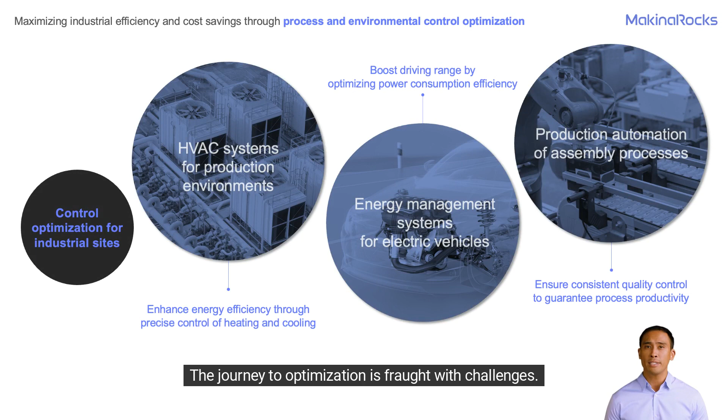The journey to optimization is fraught with challenges. Companies keen on leveraging optimization technologies face hurdles in fully integrating these solutions into their daily operations. The complexity of existing systems, the need for specialized skills, and resistance to change within organizational cultures make the path to optimization a careful one to navigate.

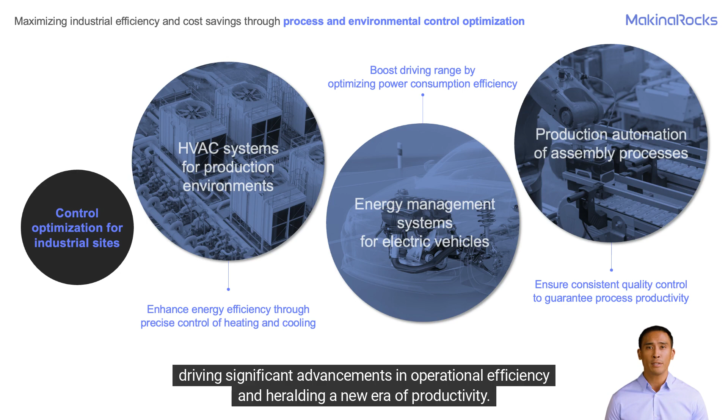Yet, the pursuit of optimization is an opportunity to revolutionize our approach to industrial processes, driving significant advancements in operational efficiency and heralding a new era of productivity.

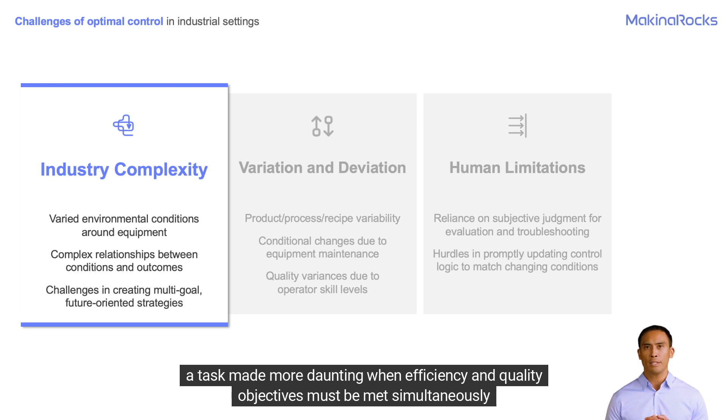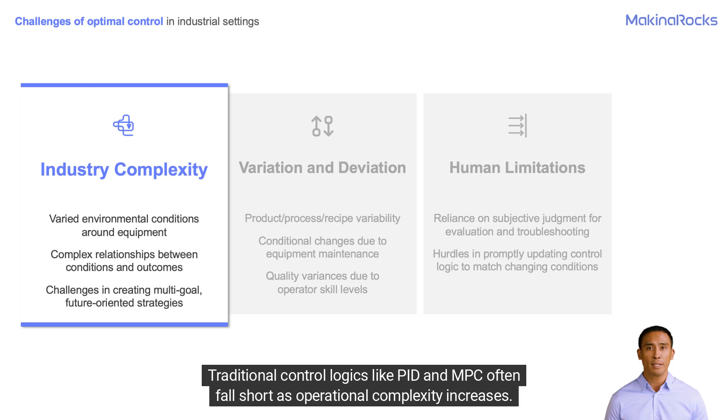Companies struggle with understanding the clear cause and effect relationships between control conditions and outcomes, a task made more daunting when efficiency and quality objectives must be met simultaneously. Traditional control logics like PID and MPC often fall short as operational complexity increases. Furthermore, the dynamic nature of industrial environments with continual product, process, and equipment changes challenges the applicability of yesterday's optimization strategies.

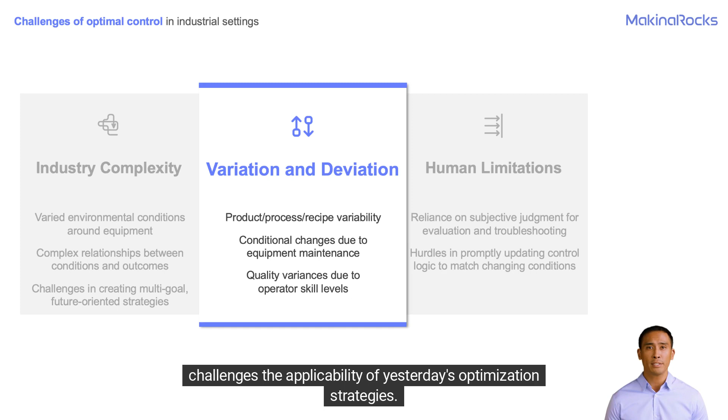Variability in operator proficiency further complicates achieving consistent optimization performance.

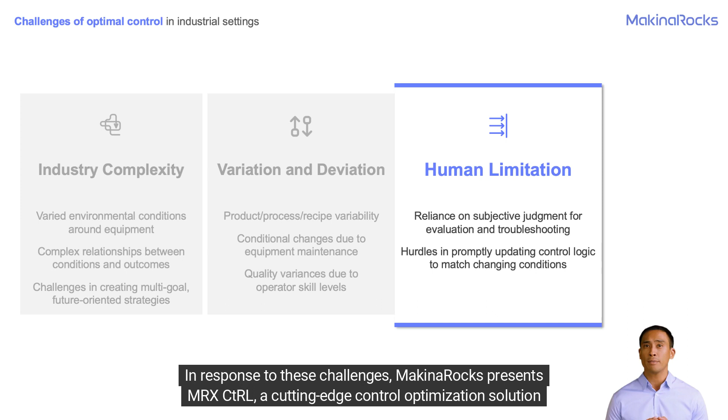In response to these challenges, MakinaRocks presents MRX CtRL, a cutting-edge control optimization solution designed to navigate and surmount these intricate challenges through two key technological innovations.

Firstly, the digital twin, a cutting-edge simulator, predicts operational outcomes using finely tuned AI models trained on real equipment data. Its foremost advantage is the utilization of real-world data alongside artificial neural network models, ensuring minimal deviation from actual outcomes and high-speed computation. Secondly, the AI Explorer, driven by reinforcement learning, is working in synergy with the digital twin to

uncover the optimal control logic. Its proactive optimization approach, in engagement with the digital twin simulation, overcomes human limitations by actively discovering the most efficient control logic and anticipating future outcomes beyond the capabilities of traditional control methods. This AI Explorer enhances the stability and performance of control operations.

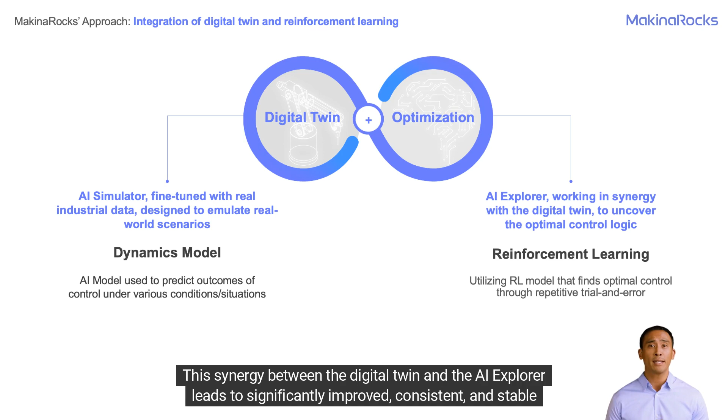This synergy between the digital twin and the AI Explorer leads to significantly improved, consistent, and stable optimization performance.

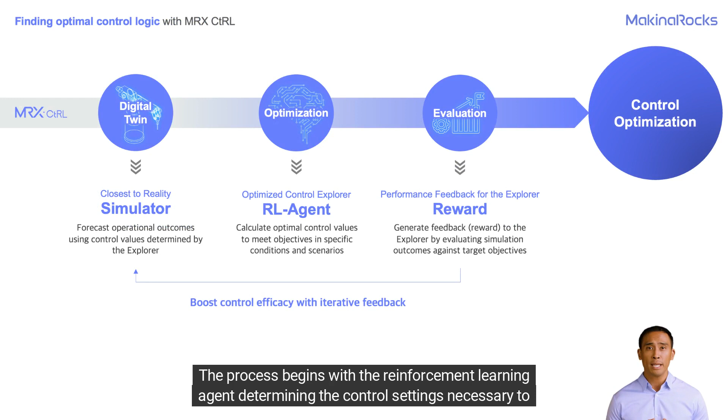Let's delve into how the MRX CtRL methodology is implemented in the industrial sector. The process begins with the reinforcement learning agent determining the control settings necessary to meet predefined objectives under specific conditions.

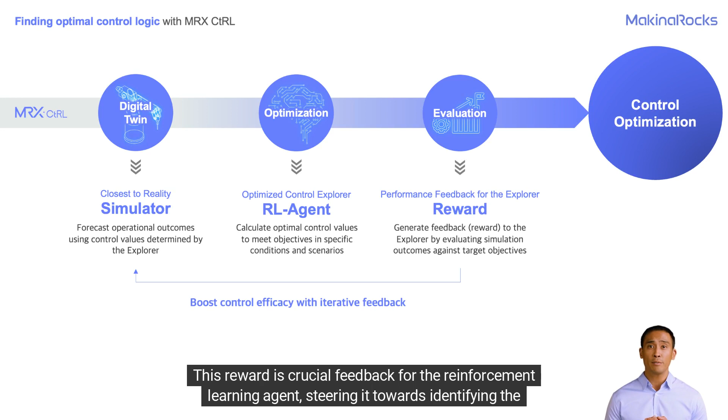It then uses the AI-powered digital twin to simulate the operational outcomes of these settings. This iterative procedure involves countless cycles of prediction, comparison against desired outcomes, and analysis of deviations to assign a reward. This reward is crucial feedback for the reinforcement learning agent, steering it towards identifying the most effective control strategy for

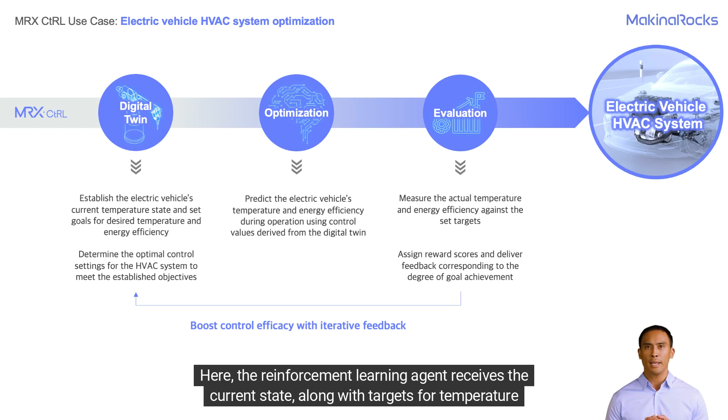maximizing performance. Take, for example, optimizing energy efficiency in an electric vehicle's air conditioning system. Here, the reinforcement learning agent receives the current state, along with targets for temperature and energy efficiency. It computes the actuator's control values to achieve these targets and inputs them into the digital twin.

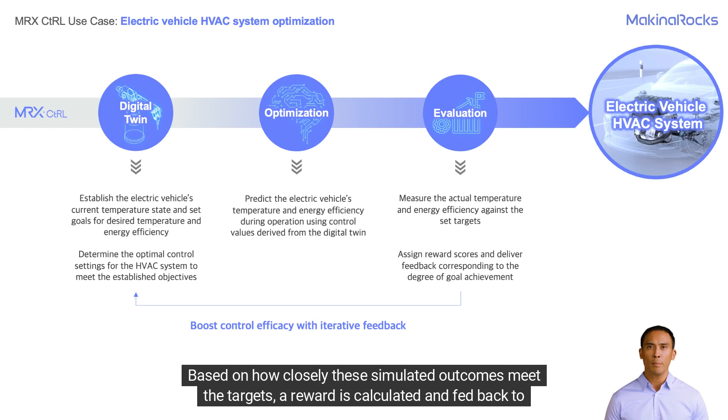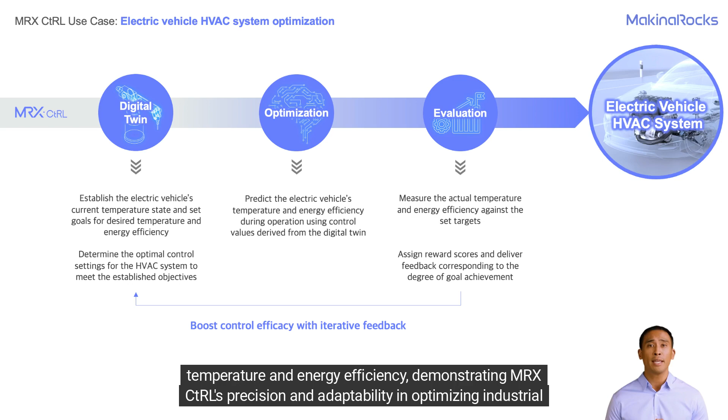The twin then simulates the expected outcomes for temperature and energy efficiency, which are compared against the targets. Based on how closely these simulated outcomes meet the targets, a reward is calculated and fed back to the agent. Through repeated cycles, the agent is guided to discover control values that hit the sweet spot of desired temperature and energy efficiency, demonstrating MRX CtRL's precision and adaptability in optimizing industrial controls.

MakinaRocks has successfully demonstrated the versatility of the MRX CtRL methodology across a broad spectrum of applications, proving its effectiveness beyond just electric vehicle air conditioning systems. This innovative approach has been applied to fine-tune industrial machinery, manage the thermal control of furnaces in steel mills, and

even optimize the operations of waste incinerator systems. Each of these domains, with their unique challenges and requirements, benefits from the precise control and efficiency improvements offered by MRX CtRL, showcasing its potential to transform a wide range of industrial processes.

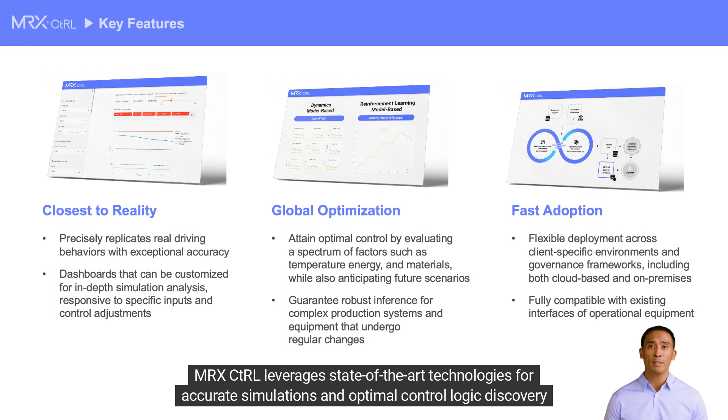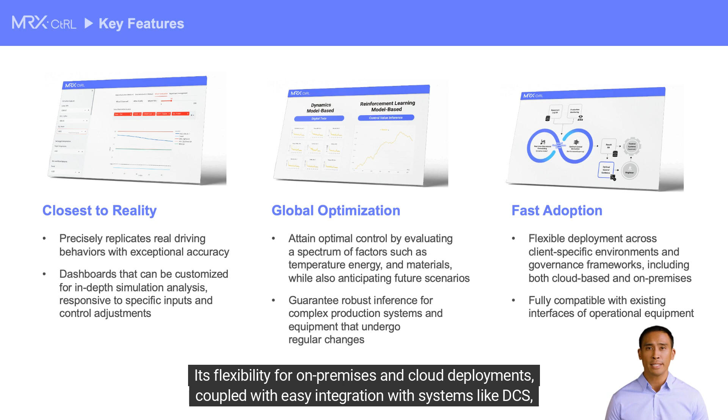MRX CtRL leverages state-of-the-art technologies for accurate simulations and optimal control logic discovery in complex environments. Its flexibility for on-premises and cloud deployments, coupled with easy integration with systems like DCS, makes MRX CtRL a pivotal solution for enhancing industrial control efficiency.

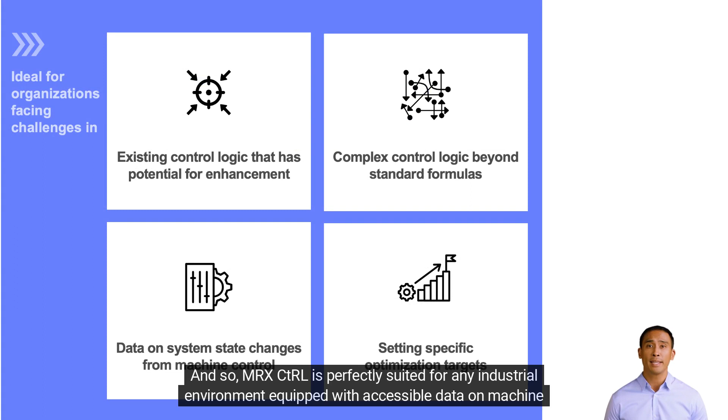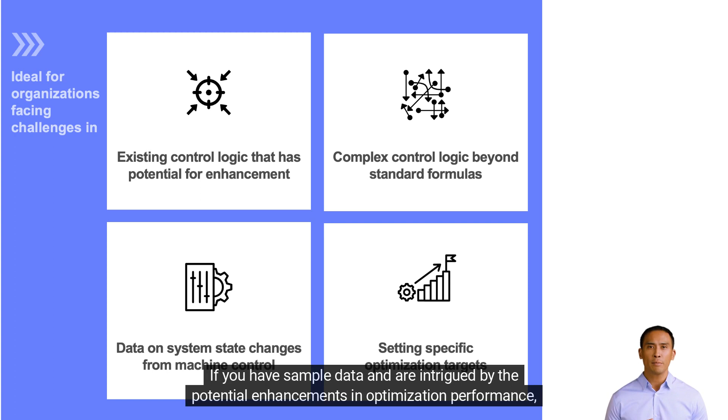And so, MRX CtRL is perfectly suited for any industrial environment equipped with accessible data on machine operations and outcomes, looking to elevate control optimization. If you have sample data and are intrigued by the potential enhancements in optimization performance, MakinaRocks offers a complimentary proof of concept to demonstrate the capabilities of MRX CtRL for your operations.